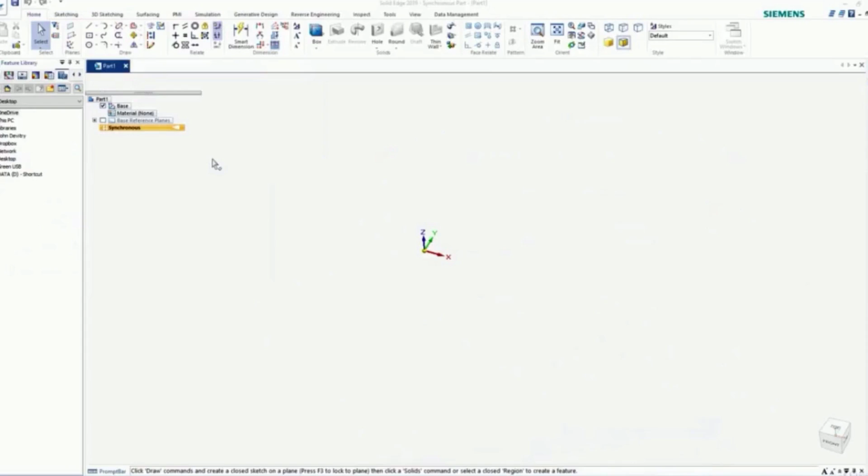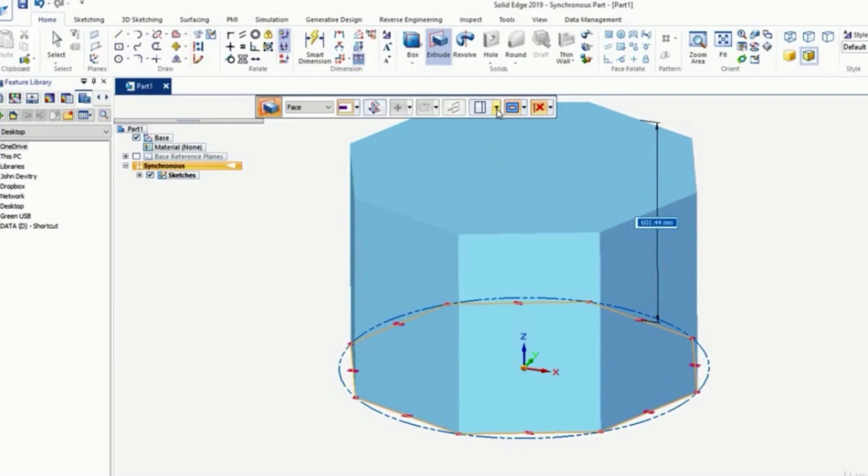Let's start with polygon by center. 8 sides, will lock to the XY plane, and at the center 500, enter, accept, and then we'll come up to extrude, identify this region, right mouse click to accept, and I'll come up to my options here, extrude options, draft, and I'd like to push this up at an angle of 24, 320 high.

And go ahead and save as box pick. Come up to the application button, new, assembly of active model. Come up to tools, frame environment, frame commands. I'll take the default, and I'd like to start with square tubing 50 by 50.

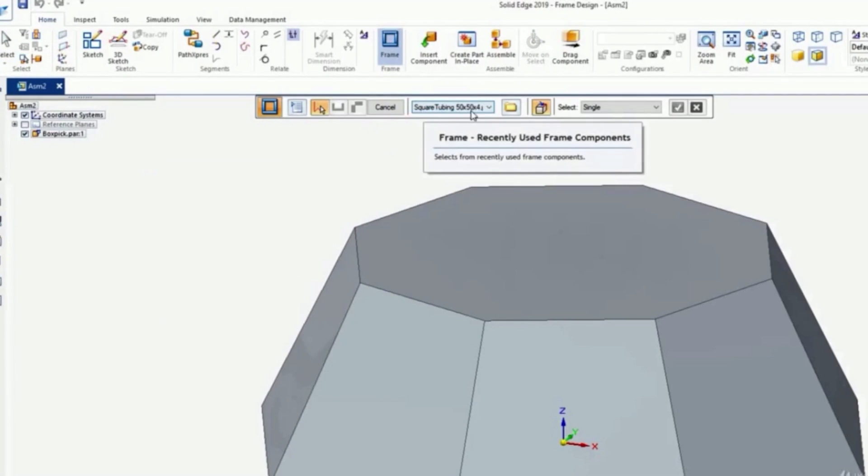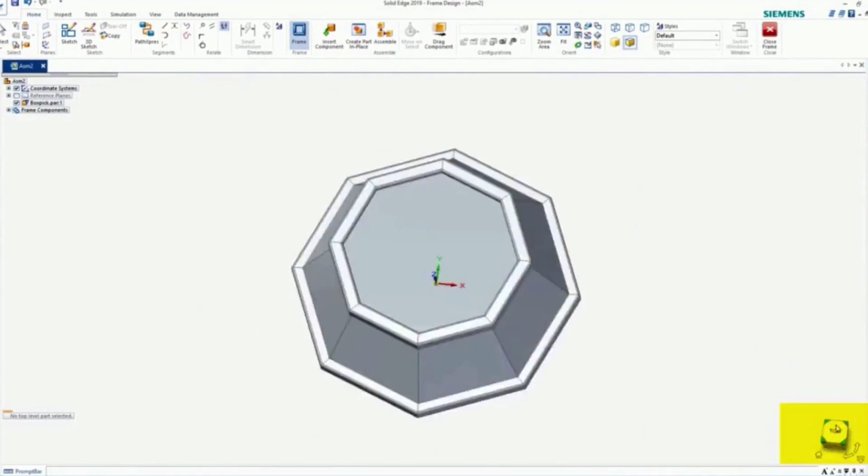And I'll change this to face, identify the top face, identify the bottom face, and green check mark. Finish, take the defaults, OK. Come over to my pull down, and this time I'd like round tubing 25 by 2. Change this to single. I'll look at this from the top view. And again, make sure this is still on round tubing and identify these lines.

And green check mark. And I'll hit finish and escape. I'll come up and turn off box pick part. And let's zoom in here. And I'd like this leg to be centered better. So I'll identify one of the bottom frame components.

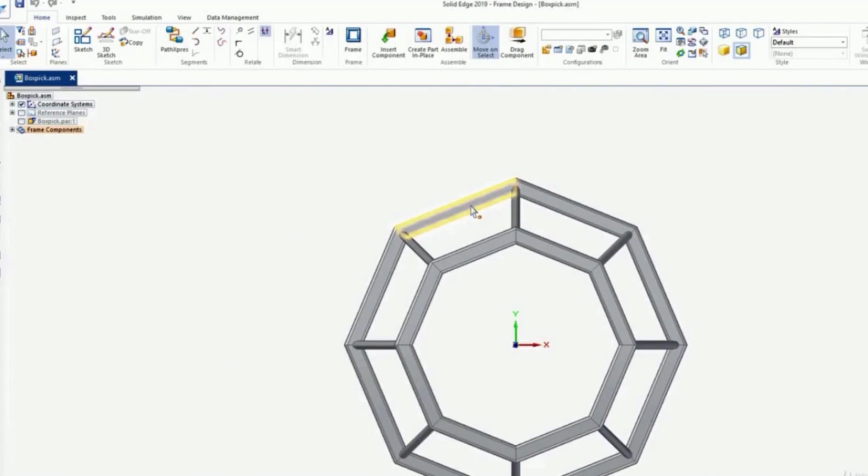If I come to the edit button, change the handle points, and I see the handle points, and I'd like to drop this down. But I notice it only changed one, and I want to change all 8 of them. So I don't want that. I'll hit escape, and I'll come up here to undo. And let's try that again.

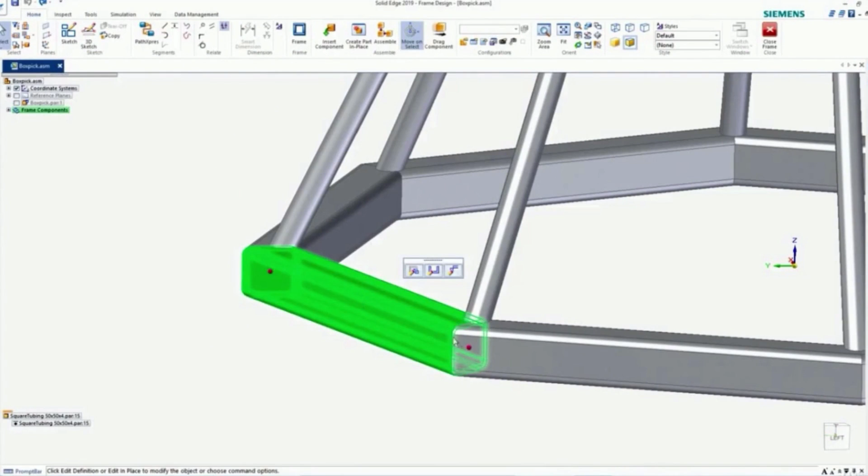I'll identify the frame component, and this time I want to click on either one of these red dots, just one, click on the dot, come up here again to edit cross section, and I'm going to fit my view because I have a problem here. I don't want it to change all of these top ones also, just the bottom ones. So what I'll do is hold down the control key and box pick, and that turns all those off.

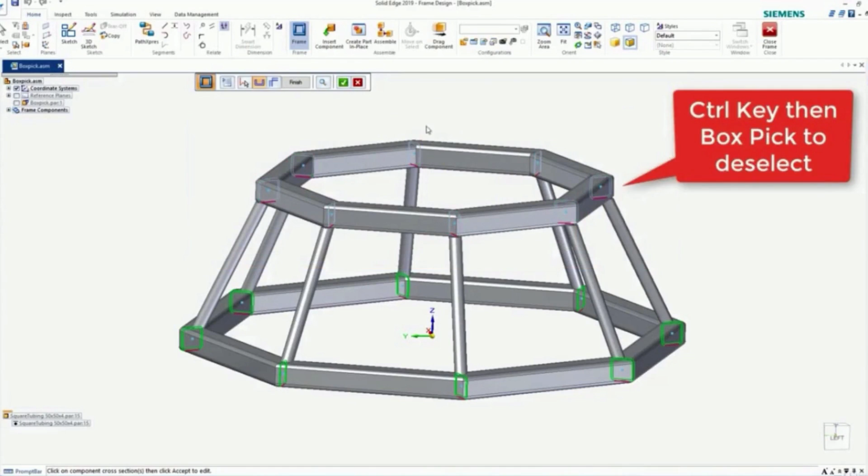And now I can green check mark to accept the bottom, come to my handle points, zoom in, and I'll accept this top handle point to drop this all down. And now it changes all of those and updates accordingly. And I'll hit finish. But I notice there's a gap in here right now at the end of the pipe.

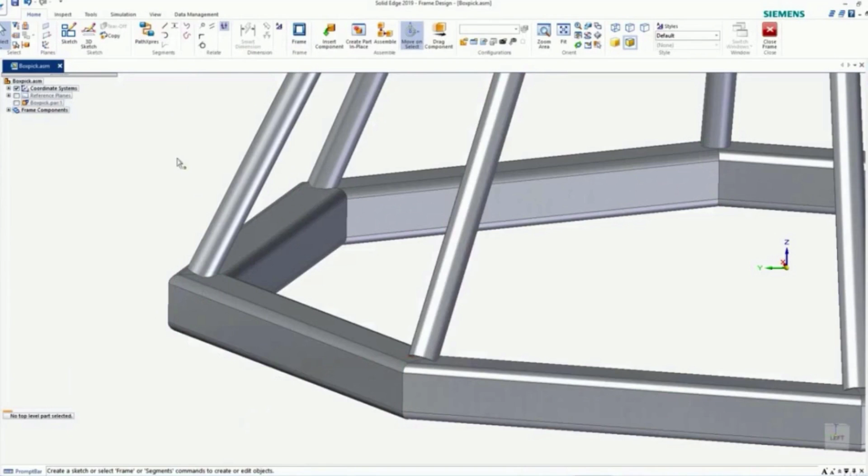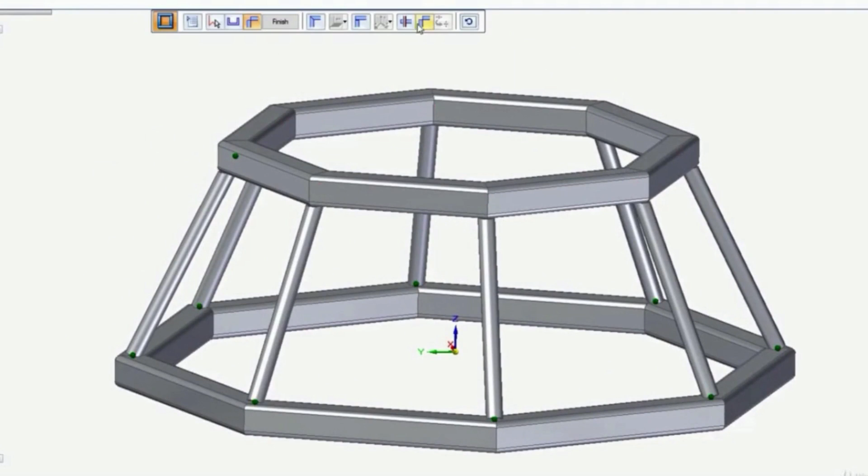So I'll identify the tubing, come to this option, edit end conditions, and I'll fit my view. And then I'll identify all these end conditions on the bottom. They're the ones I'd like to trim to the base. And green check mark. Come up to frame, extend, trim.

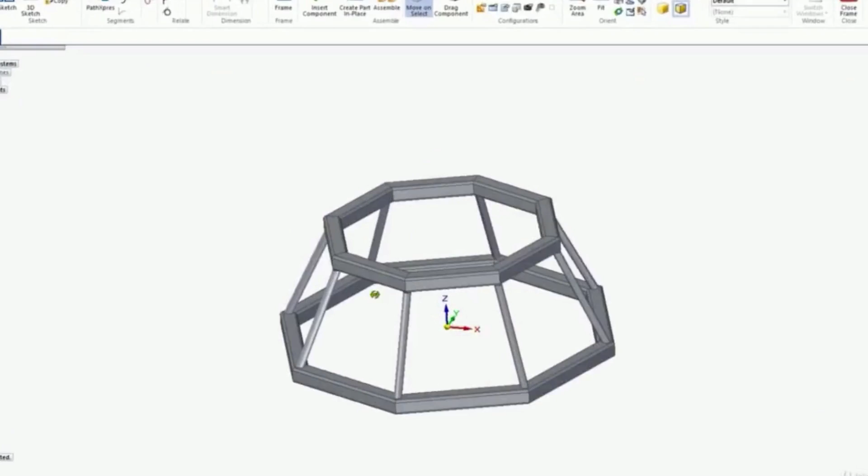I'll hesitate and wait, right mouse click, scroll till I get the plane that I want. And now they've extended and trimmed those to this base face. And now I'd like to center these bars on the other end. So I'll identify one of the frame components, and again, this time I want to click on either end, come over to my options.

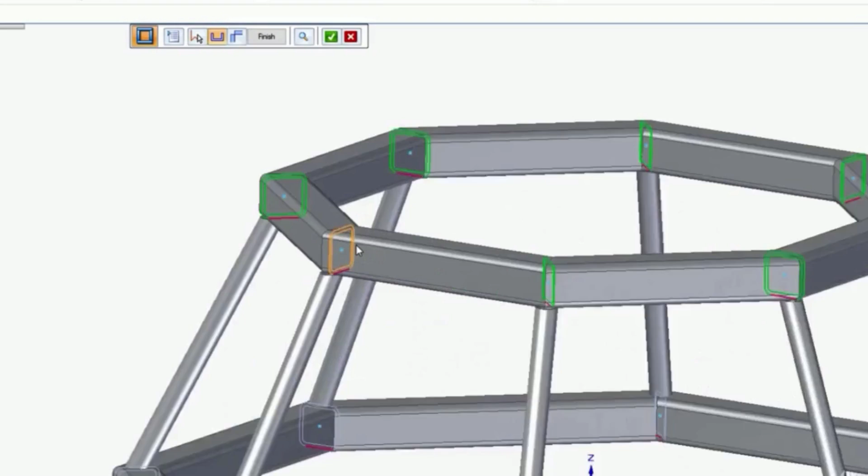Now I don't want any modifications on the bottom, so I'll hold down the control key, box pick, and turn those all off. So I'm only focusing on the top. Green check mark, come up to the edit handle points, and I'd like to lift all these up. This time I'm going to do something a little different, and this will save me trimming.

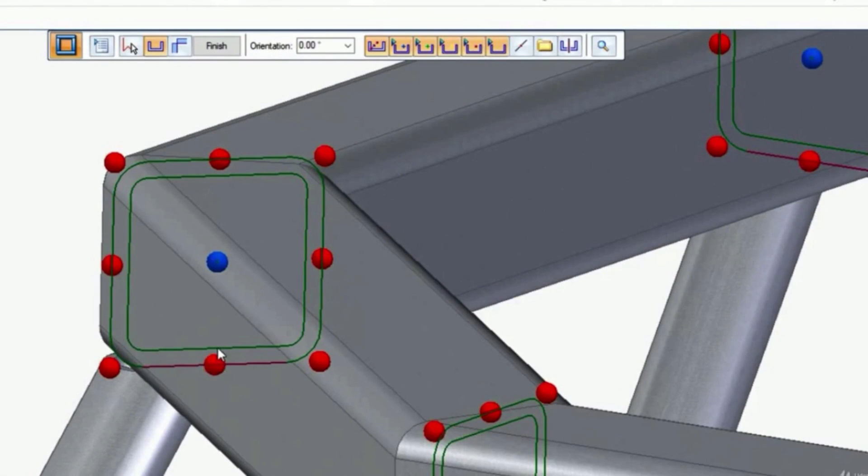If I come over here to the key points, and I'll pick the midpoint, and instead of these handle points, I can use the sketch. So I could come along to this midpoint and say lift it up not quite as high as the red dot below it. Now if I zoom in and look at that, see how I don't need to trim this now? Finish and escape, and look at this from the bottom view. Now they're centered where I want them.